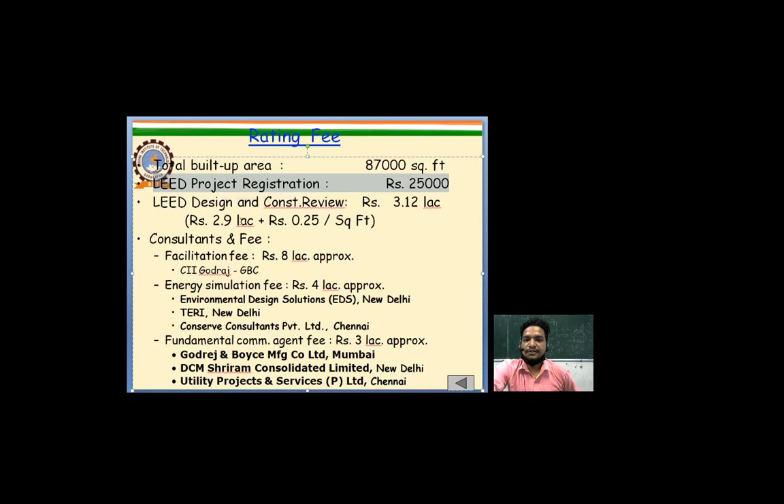Total built-up area is 87,000 square feet. LEED project registration is 25,000. LEED design and construction review fee is 3.12 lakh, and it is 2.9 lakh rupees plus 0.25 per square feet.

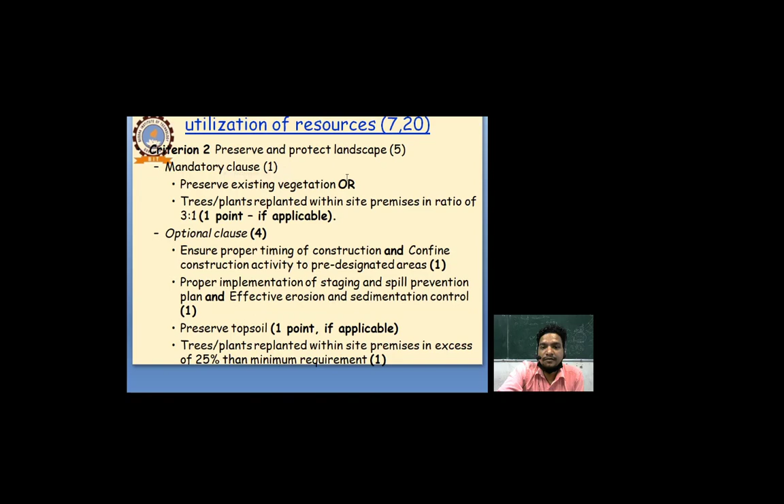I think the point should be clear to you.

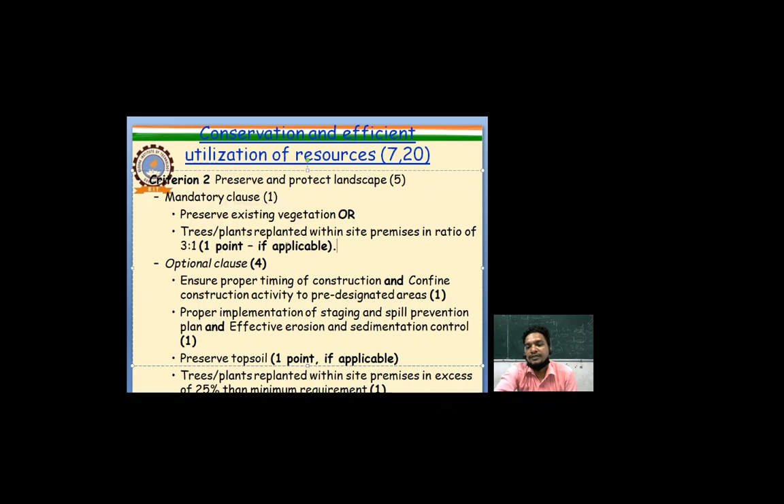Now let's talk about criteria number 3. Criteria number 3 for the conservation and efficient utilization of resources is soil conservation. In soil conservation, we talk about proper topsoil laying for vegetative growth, and the next point is proper stabilization of soil.

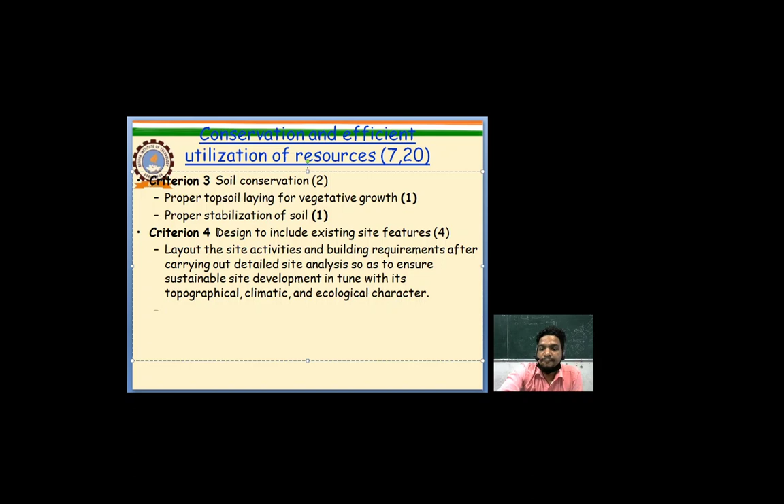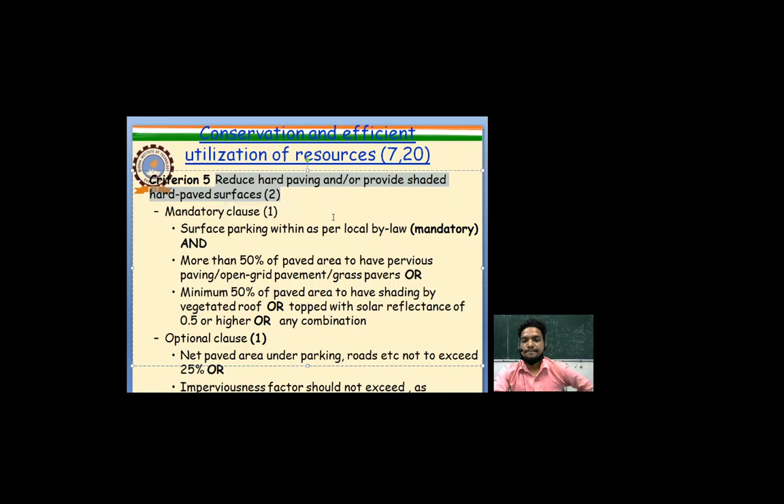Criteria number 4 is to design to include existing site features. Criteria number 5 is to reduce hard paved area and/or provide shaded hard paved surfaces.

Now let's see criteria number 6. What is criteria number 6? In criteria number 6, we talk about enhancement of outdoor lighting efficiency and using renewable energy for outdoor lighting. Here several small points are available, through which certification becomes possible. So criteria number 6 is all about the enhancement of outdoor lighting efficiency, and for outdoor lighting efficiency the whole thing should be related to the use of renewable energy resources.

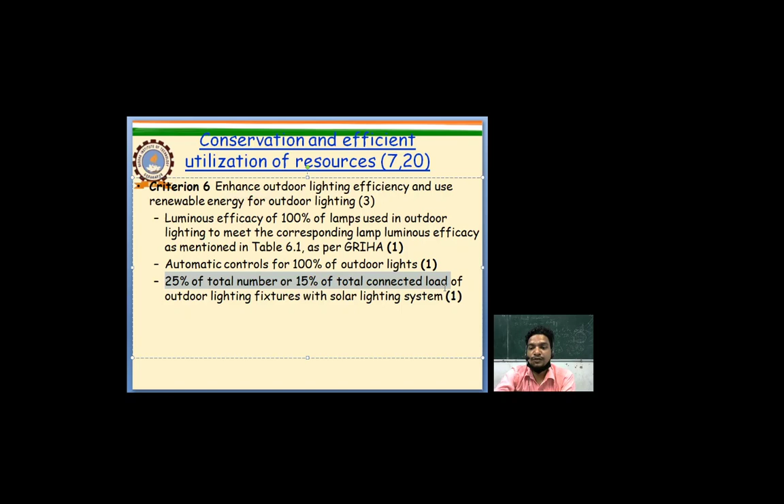Luminous efficacy of 100% of lamps used in outdoor lighting should meet the corresponding lamp luminous efficacy as mentioned. Automatic control should be there for 100% of outdoor lighting. And 25% of total number or 15% of total connected load of outdoor lighting fixtures should be with solar light system.

Criteria number 7 says to plan utilities efficiently and optimize on-site circulation efficiency. This means we are talking about ways to minimize transportation as well as service corridors and setting up pedestrian routes. Further, we will use aggregate utility corridors.

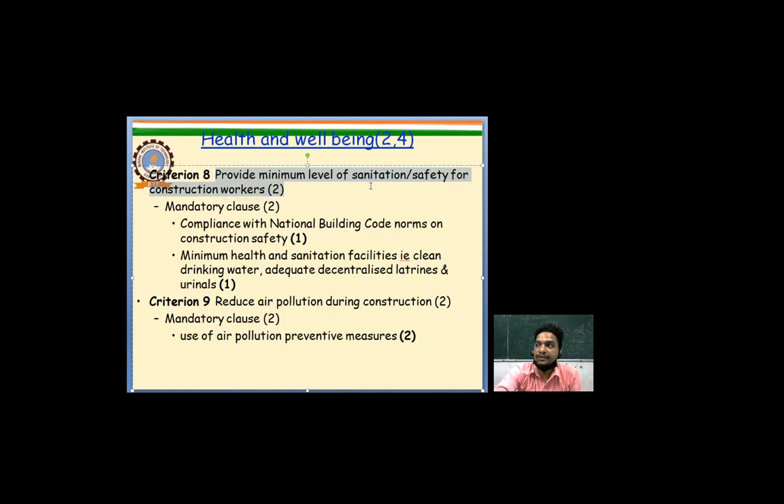Next is health and well-being. Criteria number 8 says to provide minimum level of sanitation safety for construction workers. Criteria number 9 is to reduce air pollution during construction.

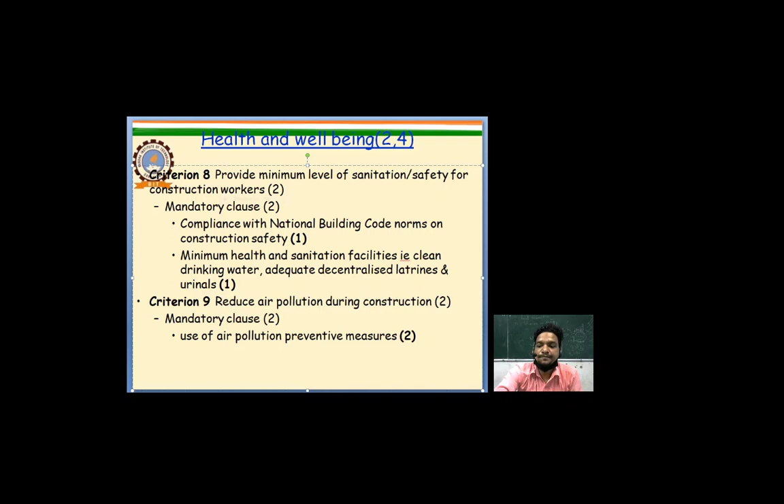Now, building planning and construction. If we are talking about building planning and construction, then definitely we will talk about conservation and efficient utilization of resources. It means maximizing resources like water, energy, materials, and enhancement of the efficiency of systems. Water, energy, recycle, recharge, waste management — these are the keywords for building planning and construction, and the main point is the health and well-being of occupants.

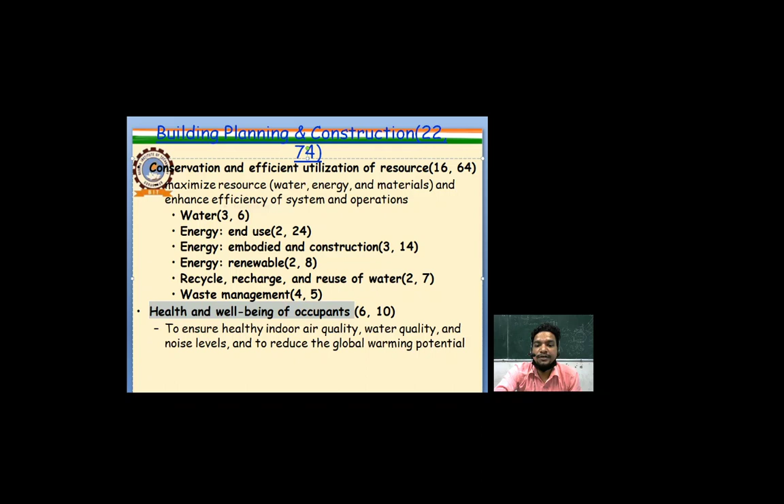Criteria number 10 is to reduce the landscape water requirement by 30%, 40%, or 50%. Up to 30% reduction gets 1 point, up to 40% reduction gets 1 additional point, and at 50% a total of 3 points can be earned.

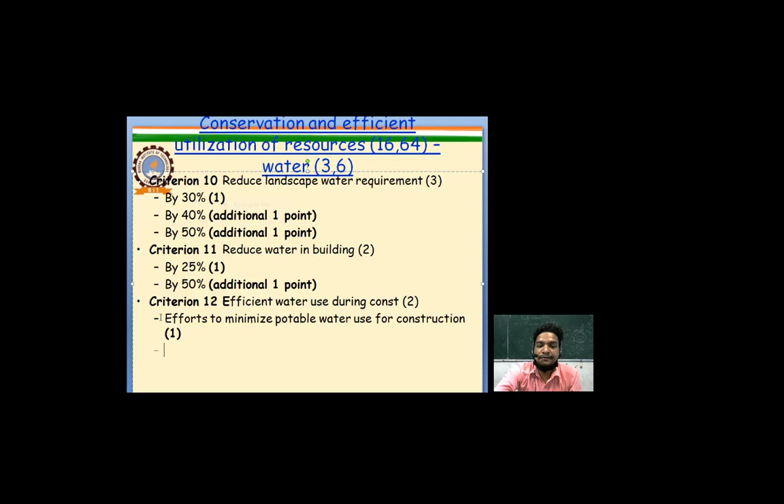Criteria number 11: we will talk about reducing water use in buildings. 2 points are available — 25% reduction gets 1 point, 50% reduction gets 1 additional point. Now criteria number 12 is efficient water use during construction, with efforts to minimize potable water use for construction.

Now, conservation and efficient utilization of resources — energy and its use — criteria number 13. Criteria number 13 is to optimize building design to reduce conventional energy demand. Mandatory clause: appropriate planning which reflects climate responsiveness gets 2 points. Adequate day lighting is provided, rated at 25.

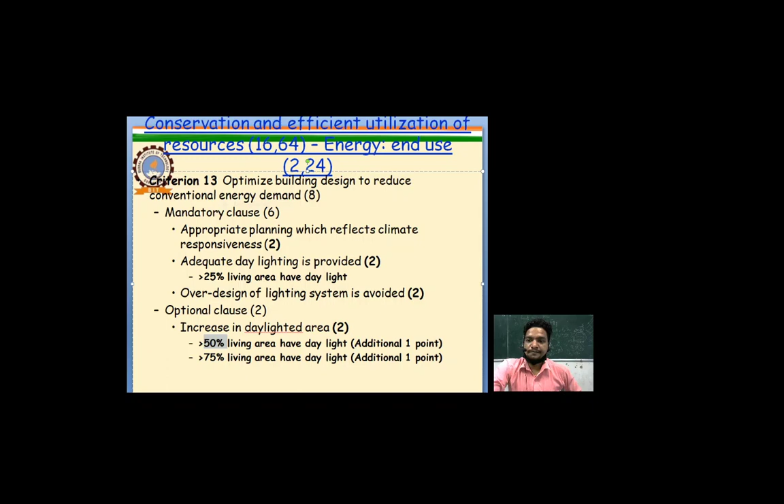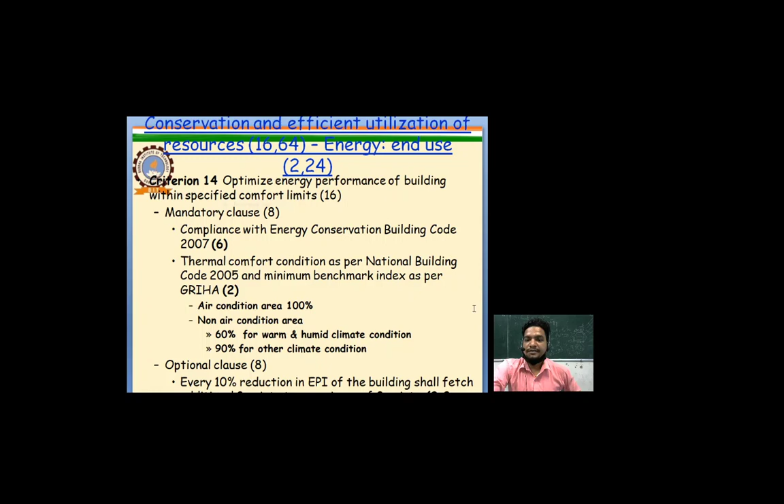Additional points can be earned here if more than 50% of living area has daylight, and if more than 75% of living area has daylight. Criteria number 14 is all about the optimization of energy performance of building within specified comfort limits. Criteria number 15 is all about utilization of fly ash in building structure, with an additional 1 point given if the percentage of cement replacement with fly ash reaches 30%.

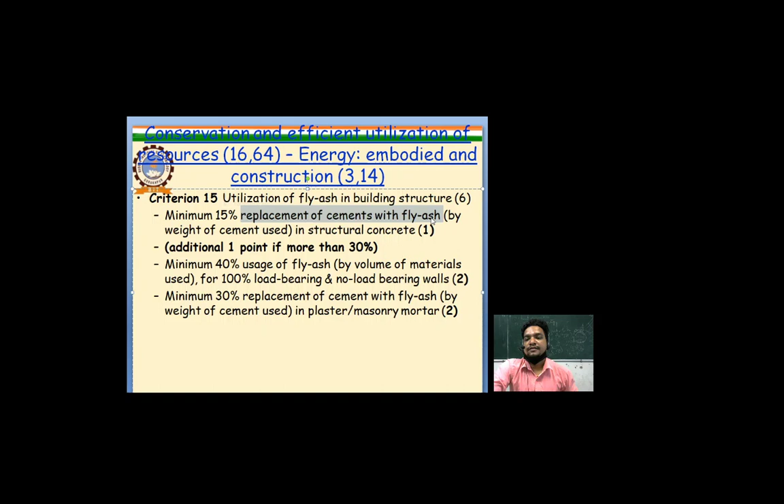Criteria number 16 is related to use of low energy material in interior.

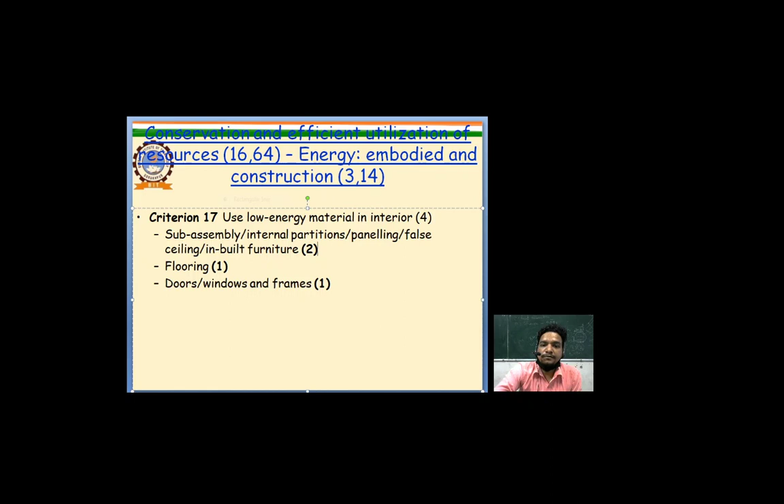Criteria number 18 is related to renewable energy utilization. This is a very important point, related to the use of renewable energy resources, meaning we have to use energy resources that can be recycled again and again.

Mandatory clause: equal to or more than 1% of internal lighting and space conditioning connected load in the building. For one point, at least 1% or more should be internal lighting and space conditioning connected loads in the building.

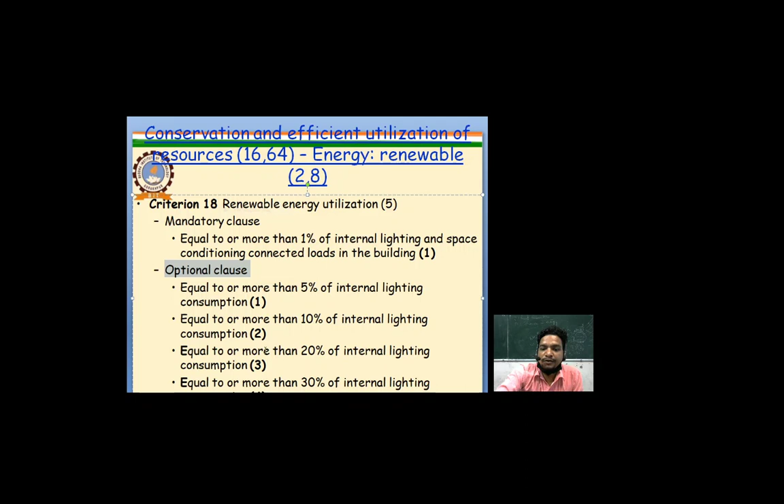Optional clause: 5% gives 1 point, 10% gives 2 points, equal to or more than 20% gives 3, then 4 points accordingly. But the mandatory clause is that it should be equal to or more than 1% of internal lighting and space conditioning connected loads in the building.

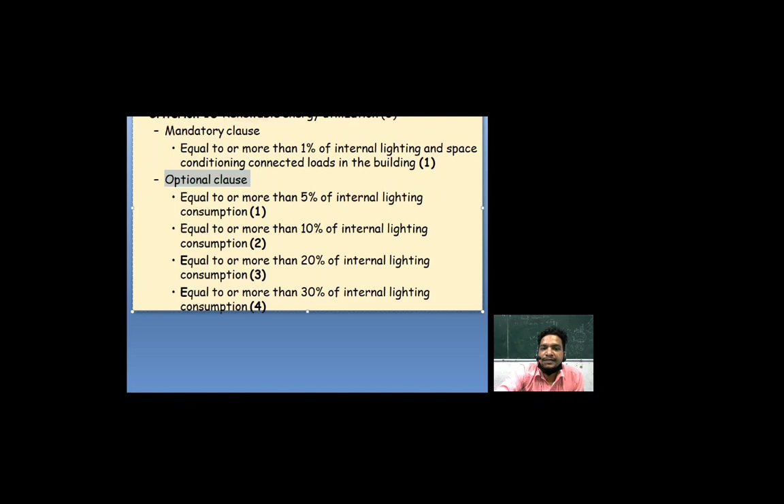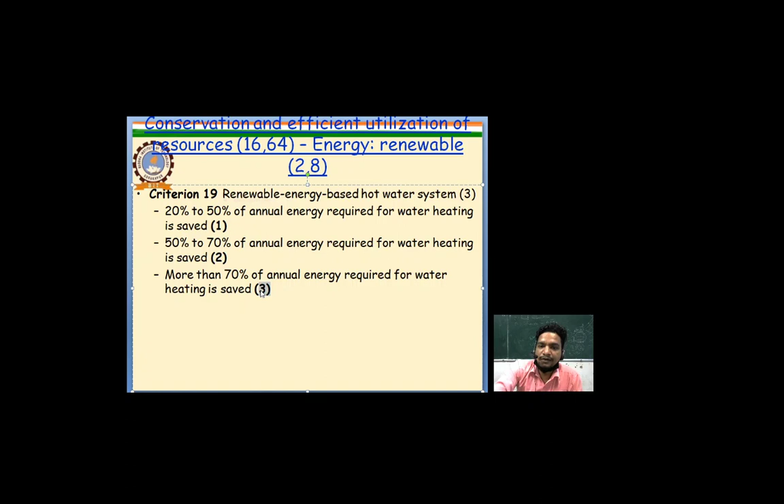Criteria number 19 is related to renewable energy based hot water system. If this value lies between 20 to 50%, it gives 1 point. If it lies between 50 to 70%, it gives 2 points, and further it gives 3 points for more than 70%.

Criteria number 20 is related to wastewater treatment. Criteria number 21 is related to water recycling and reuse. You can take a screenshot because this value increases as the percentage increases.

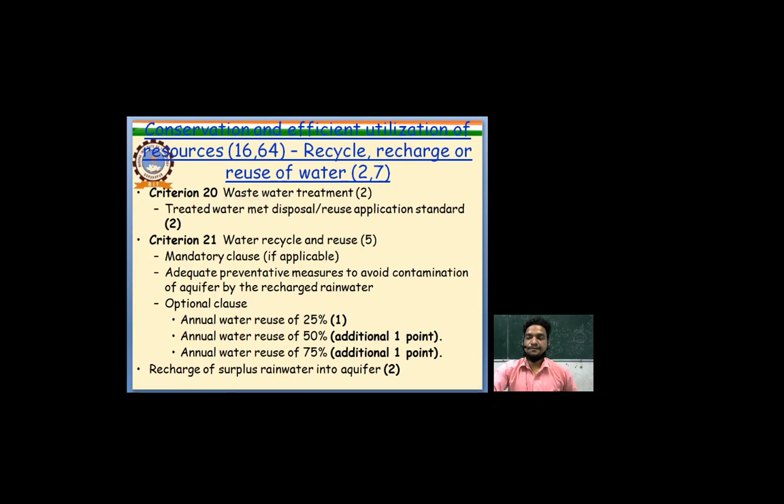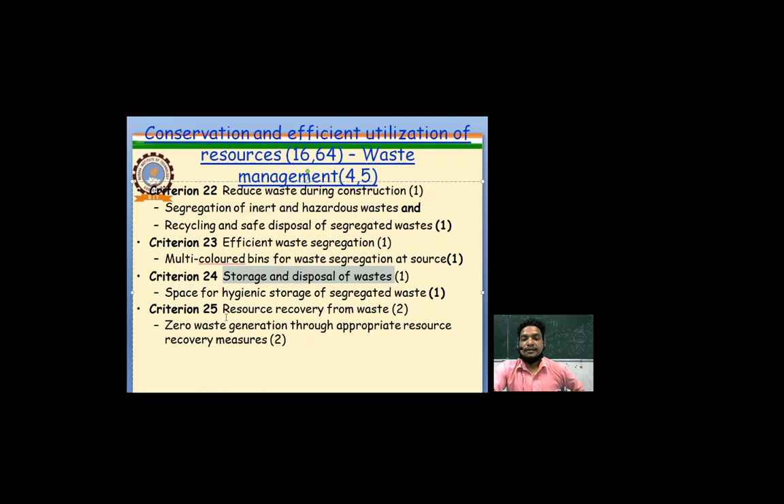Criteria number 22: reduce waste during construction. Criteria number 23: efficient waste segregation. I think this should be very clear to you. Criteria number 24: storage and disposal of waste. Criteria number 25: resource recovery from waste.

Criteria number 26 is for health and well-being, that is use of low VOC paints, adhesives and sealants. Criteria number 27 is to reduce ozone depleting substances.

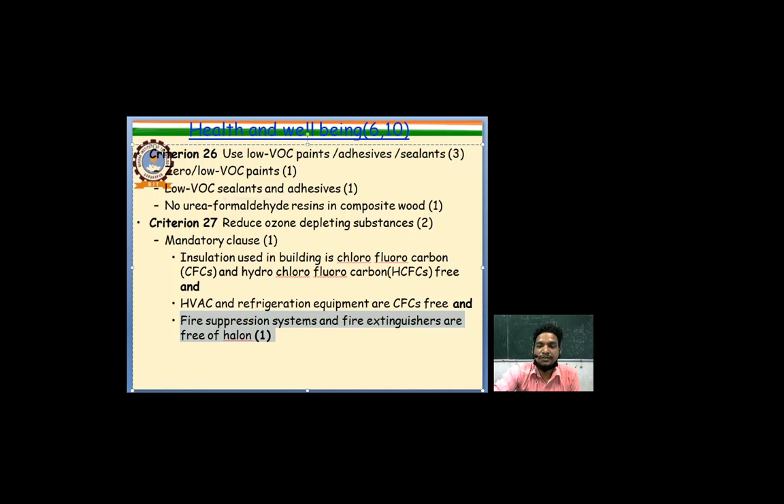Water quality conforming to IS standards. Criteria number 29 is acceptable outdoor and indoor noise levels.

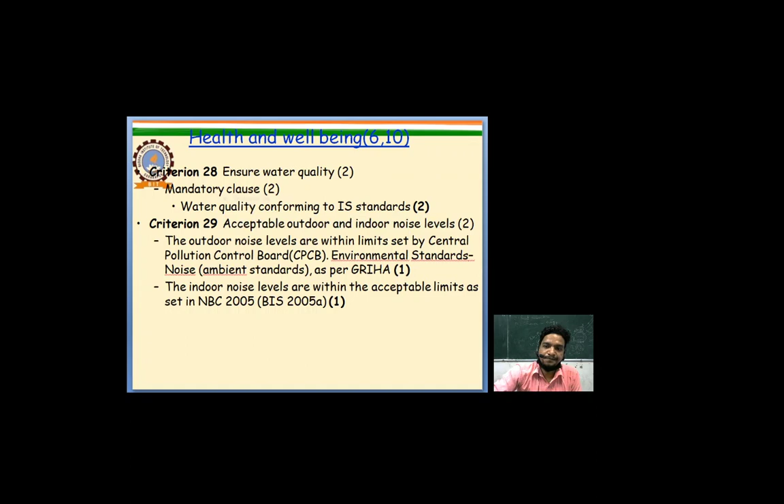Criteria number 30 is tobacco smoke control, a mandatory clause. The company policy should ban and prohibit smoking within the building premises. In criteria number 30, tobacco is strictly prohibited.

Criteria number 31: provide at least the minimum level of accessibility for persons with disabilities, meaning compliance with National Building Code norms on requirements for planning of public buildings needed for use by physically challenged persons. Points are specified in this for the physically challenged.

Then criteria number 32 - what does it say? This is all about energy audit and validation. Energy audit report by an energy auditor approved by the BEE. Criteria number 33 is all about operation as well as maintenance.

Now, finally we will talk about innovations, existing in criteria number 34. Additional points above 100 points - 4 innovation points are available under the rating system for adopting criteria which enhances the green intent of a project.

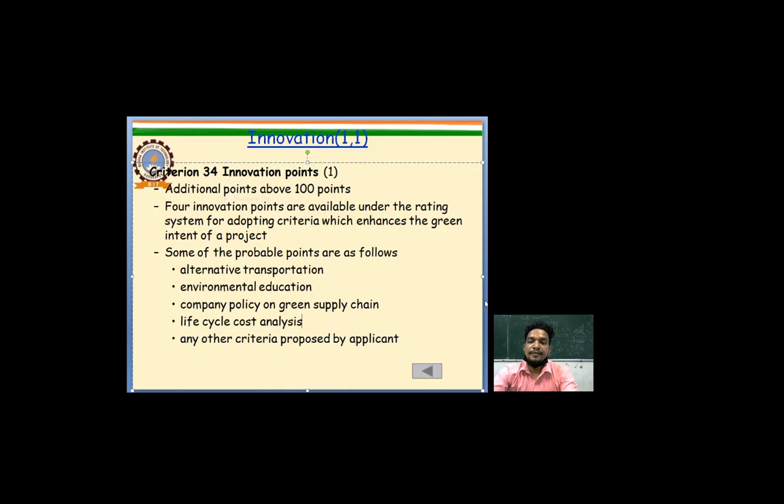If we talk about the criteria before this, criteria number 32, energy audit and validation - this can take much more time because the validation process takes place in this.

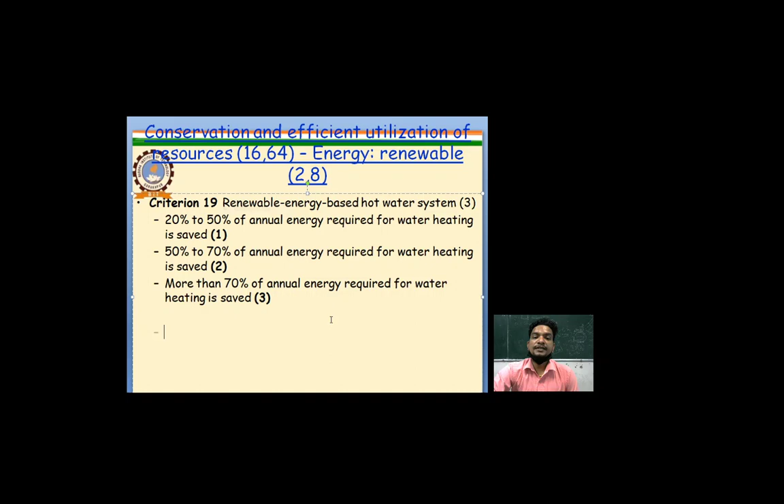Now the sustainable site planning, after the conservation and efficient utilization of resources. If we are talking about conservation and efficient utilization of resources, then definitely we will talk about maximization of conservation as well as utilization of resources. If we will utilize resources like land, water, natural habitat, fuel and energy etc., definitely we can establish green building.

And definitely, if we will think about the health and various issues by which the inhabitants can find a healthy environment, definitely we will talk about the subject which is subjected to protect the health of construction workers and prevent pollution.